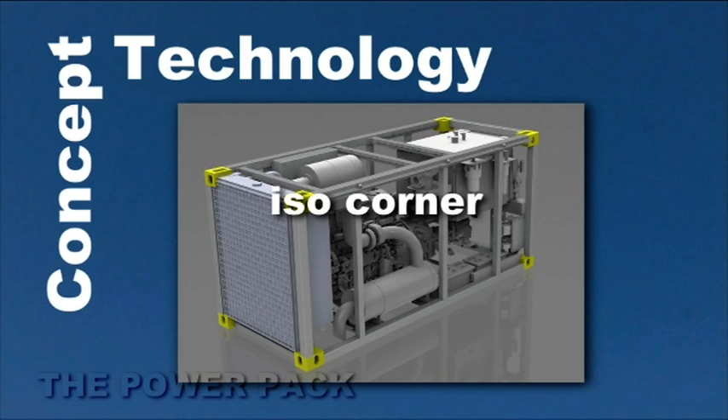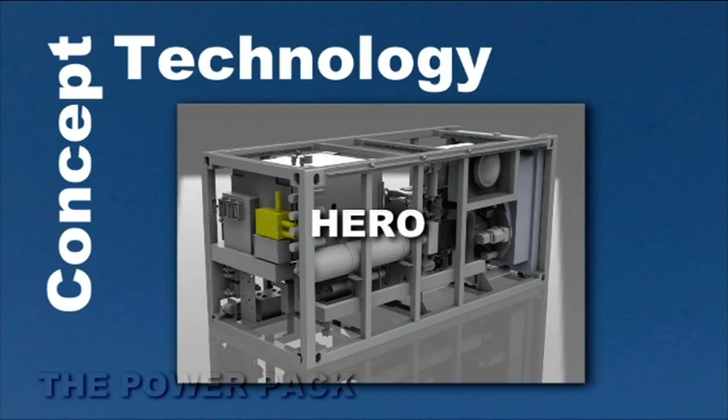The power pack is composed of ISO container corners on the power pack chassis to remove it, an engine to steer the vehicle and propel it forwards and backwards, ventilation to cool the mechanical components, batteries to supply the starter when Hero Start is not used, and Hero Stop and Start to actuate the engine without a battery or starter.

AMTS is a full hydraulic system. The power is produced by a hydraulic pump which draws power from the diesel engine. The hydraulic energy is distributed directly to all wheels.

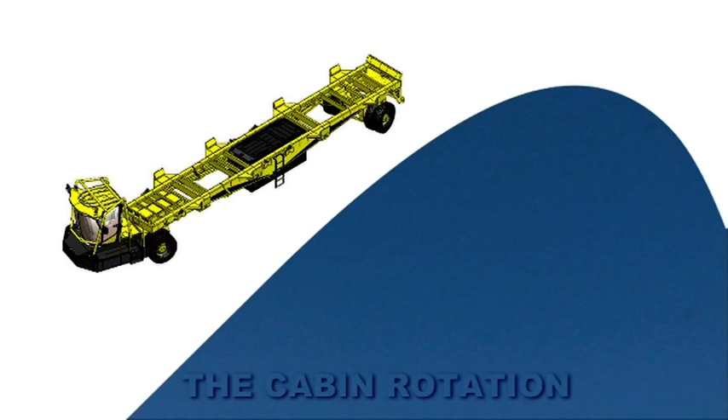Shorter vehicle length, smaller turning radius of 13 meters, and individual control of the wheels by an onboard computer dramatically improve AMTS maneuverability.

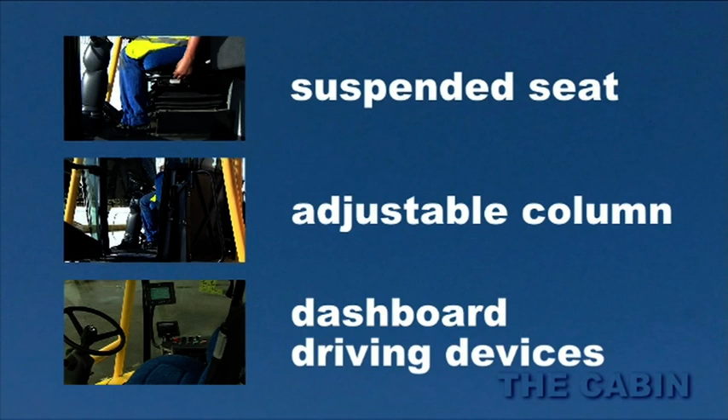The AMTS's ergonomic cab, fully screened, well insulated against noise and temperature, offers immediately an intuitive driving experience to the user. High-quality elements like the suspended driver's seat, the adjustable steering column, the dashboard, and driving devices provide very good comfort to the driver.

Thanks to the technology used, there is no clutch pedal anymore. Acceleration and deceleration are very smooth.

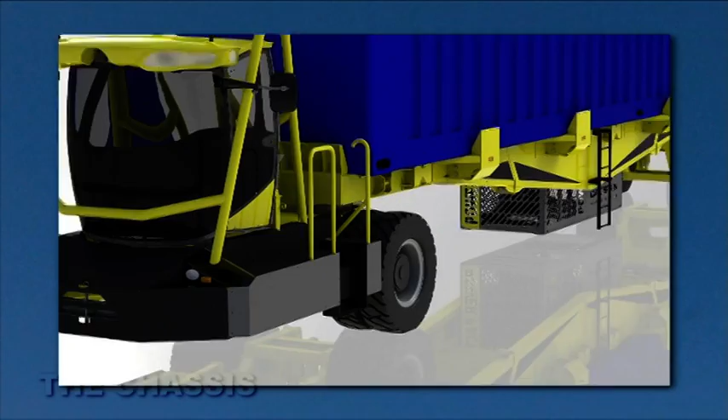This patented chassis is bent instead of welded to increase fatigue resistance, avoid cracking of the weld bead, and improve resistance to shock. This technology also offers better corrosion protection.

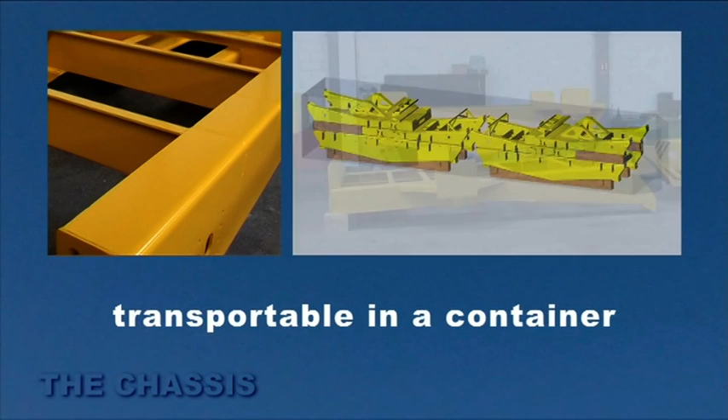The strong chassis, built in 3 modules fixed together by bolts, is sustainable for twin lift operations. Thanks to this modularity, the AMTS can be shipped in containers instead of by RORO shipment, with screw connections to assemble with the front and rear axle modules.

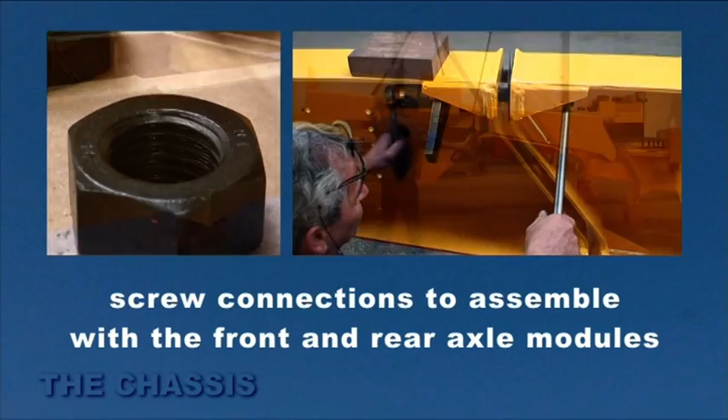The vehicle is subject to technical checks which give rise to certificates issued by independent bodies recognized worldwide: TÜV, Bureau Veritas, APAVE.

Very smooth ride, of course. Nothing beats actually getting into the machine and having a little bit of a feel. Compared to the traditional tractor, it feels quite strange the way you can move the cabin around like that. And obviously that's going to help a lot with the turning, the sharp corners and things like that. So I think it's a very interesting concept.

Enjoyed the drive. The ability to get an operator fresh off the street, put him in the machine, and have him driving within a few hours is quite good. The interchangeability of the power pack and the ability to make good use of the machine is extremely interesting, and I think I've found quite a good product.

The machine shows realistic cost savings, not just in terms of manufacturing, but also in terms of maintenance, downtime, and the overall picture - the productivity, the efficiency. First impression is it looks like a normal car to drive, first of all, but longer, all I can say. And it's easy to operate and use.

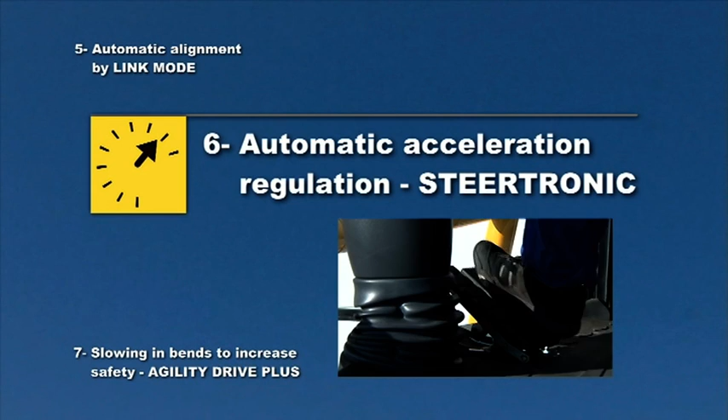5. Automatic alignment by link mode for the precise alignment of several vehicles for operations under cranes. 6. Automatic acceleration regulation, Steertronic, to program speed and reduce fuel consumption while increasing vehicle longevity. 7. Slowing in bends to increase safety, Agility Drive Plus to program speed when turning the wheels.

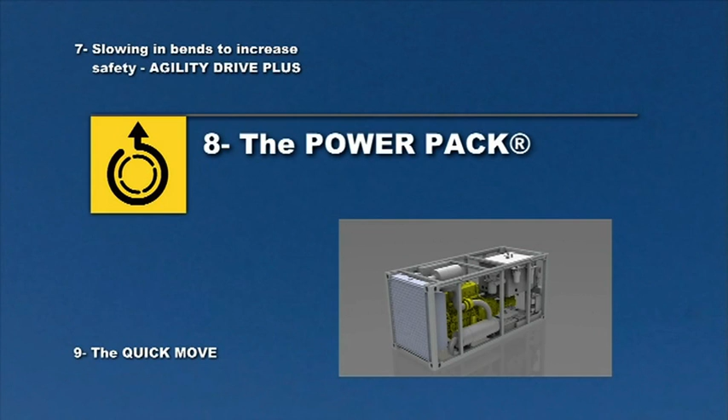8. Power Pack, the concept of concentrating the energy components in a removable container, with a choice of power and type of engine. 9. Quick Move to extract the Power Pack in minutes and carry out maintenance or repairs.

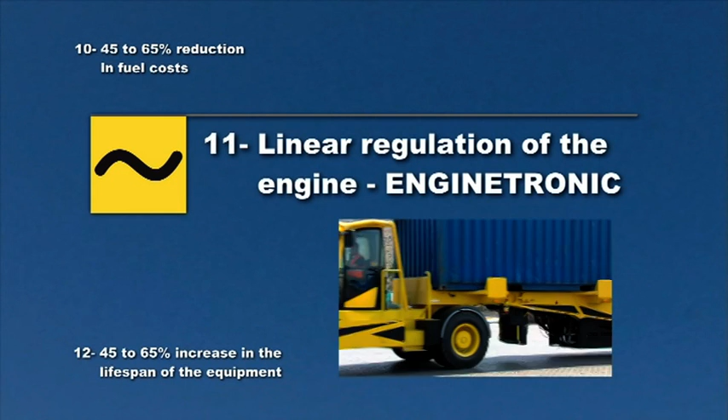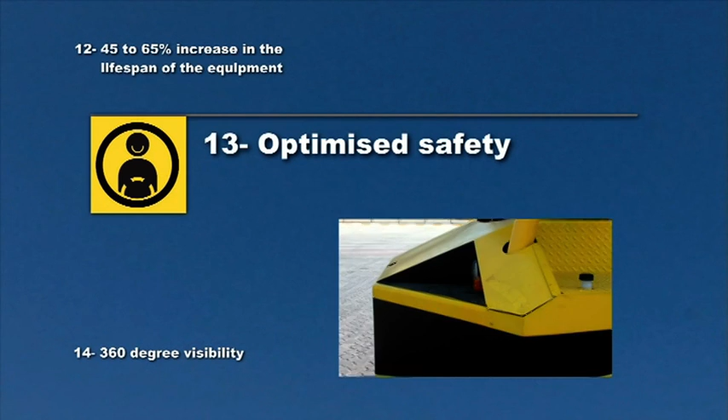12. A 45 to 65% increase in the lifespan of the equipment. 13. Optimized safety for the driver thanks to the safe box front and side bumpers, the hoops around the cab, and the placing of the engine at a safer distance.

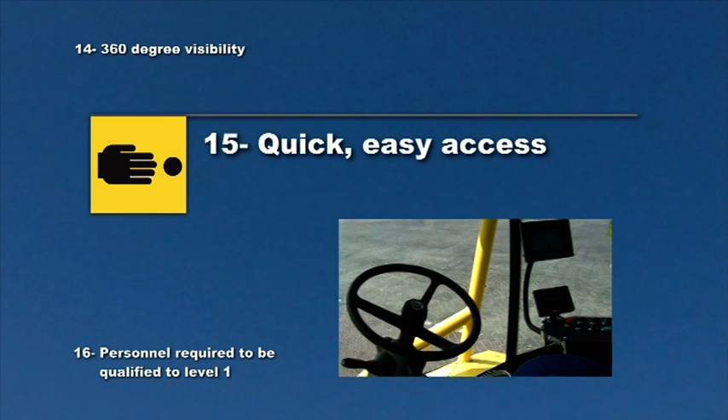14. 360-degree visibility. 15. Quick, easy access to all the functionalities in the cab and also in the Power Pack. 16. Personnel required to be qualified only to Level 1 for maintenance and operation.

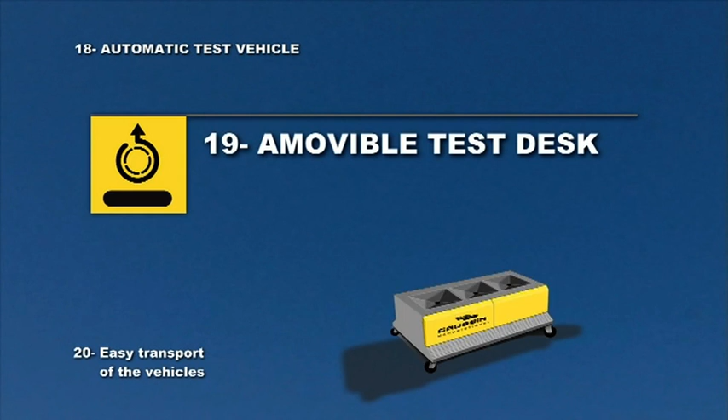17. The lowest cost on the market for maintenance, management of stocks of spare parts, and the surface area required in the repair shop. 18. Automatic test vehicle for testing and maintenance without stopping operations. 19. Amovible test desk, a removable test and maintenance bench for the Power Pack.

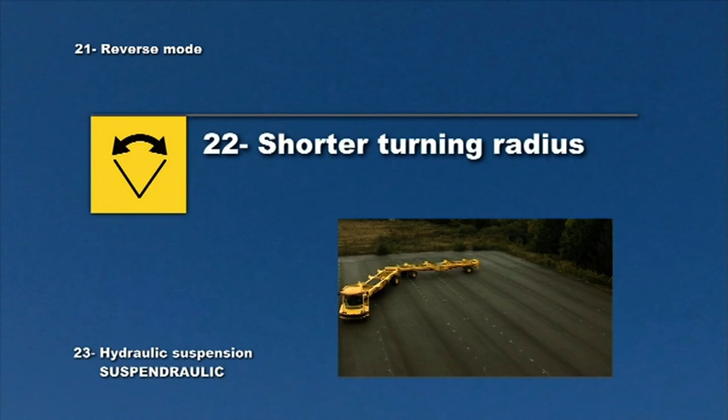20. Easy transport of the vehicles, designed to be packed into a container. 21. Reverse mode. 22. Shorter turning radius. 23. Hydraulic suspension, Suspendraulic. 24. Maintenance reduction of 50%.